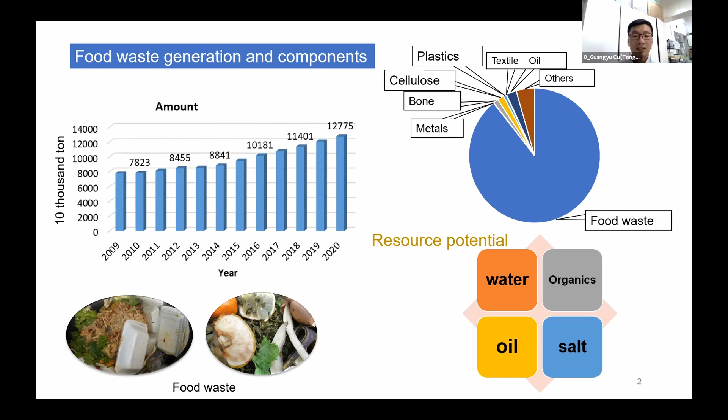Given the facts mentioned above and the faster society development in recent years, in our country several government departments, including the State Council, Ministry of Housing and Urban-Rural Development, Ministry of Ecology and Environment, as well as Ministry of Agriculture and Rural Affairs, released related policies and regulations about waste sorting and sourced resource utilization.

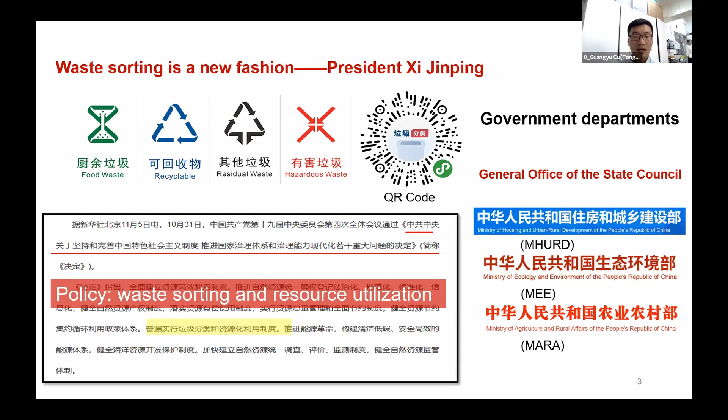For anaerobic digestion, although there is a high extent of harmless resource utilization, high cost and technical risk usually make the technology unstable, and anaerobic digestion is commonly not suitable for rural areas due to the cost of long distance transportation. In addition, for composting, long treatment time and low quality product are also problems. And homologous issues of feed processing may lead to quite high policy risk, even though the technology has high harmless and reduction levels.

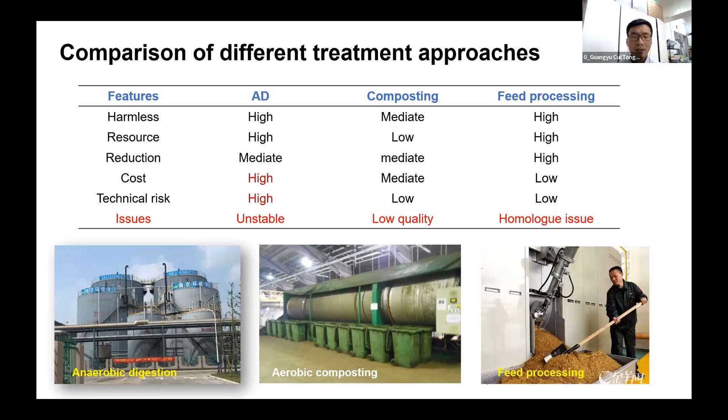Furthermore, by the way, to achieve the sustainable development of the world, in the general debate of the 75th session of the UN General Assembly in 2020, our President Xi promised that China aims to have CO2 emissions peak before 2030 and achieve carbon neutrality before 2060.

Bioconversion of food waste by housefly larvae or black soldier fly is regarded as a solution due to the high waste reduction rate and valorization level. Therefore, here we will share the state of the art technology, intelligent equipment, and a practical case.

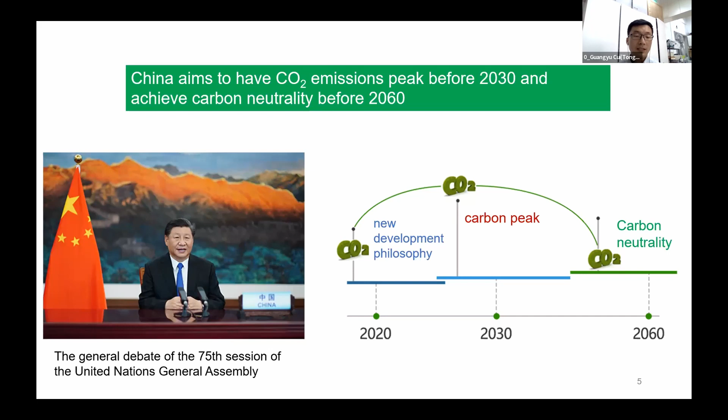After that, the material is transported through the automated guided vehicle system.

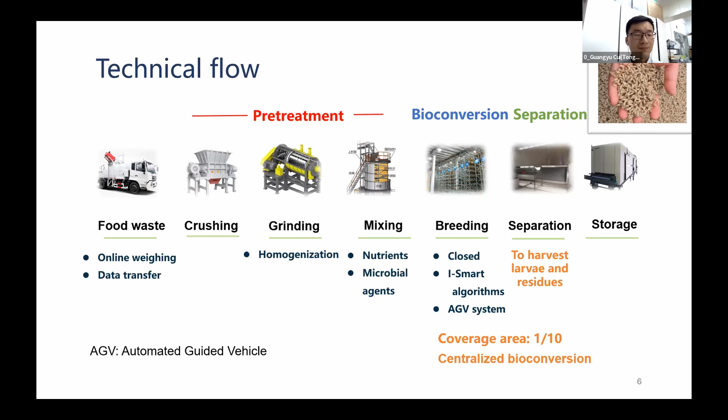Now I will share the key technologies of housefly bioconversion, including the iSmart algorithms and AGV system. Firstly, we need to put some important operating or environmental factors into the iSmart algorithms system.

Such as temperature, humidity, oxygen, water content, and so on, into the iSmart algorithms system.

After calculation of the neural network, we can know the optimal operating and draining parameters such as heating, ventilating, and mixing. Then the information will respond to the AGV system to further optimize the bioconversion performance.

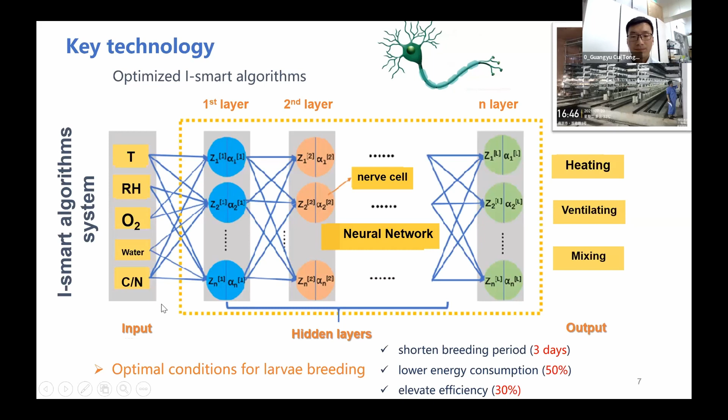Using iSmart algorithms can shorten the breeding period by 3 days, with lower energy consumption.

Another key technology is the AGV system, automated guided vehicle, in the bioconversion system. The AGV system achieves 3 important functions, including feed and larvae distribution, turning, and automatic harvest.

Therefore, the AGV system can efficiently improve the breeding environment and reduce manual intervention. In other words, it can reduce the whole cost.

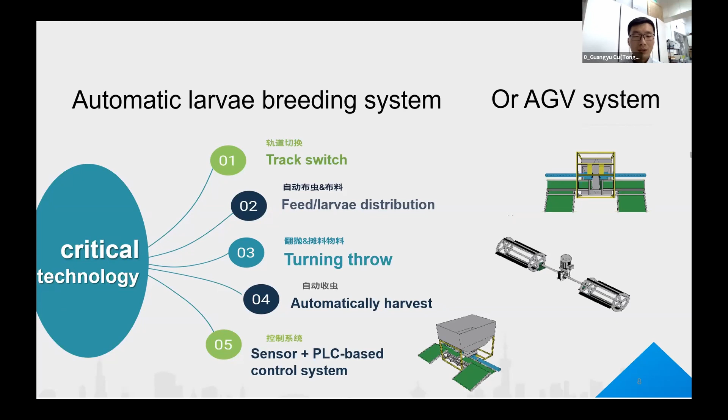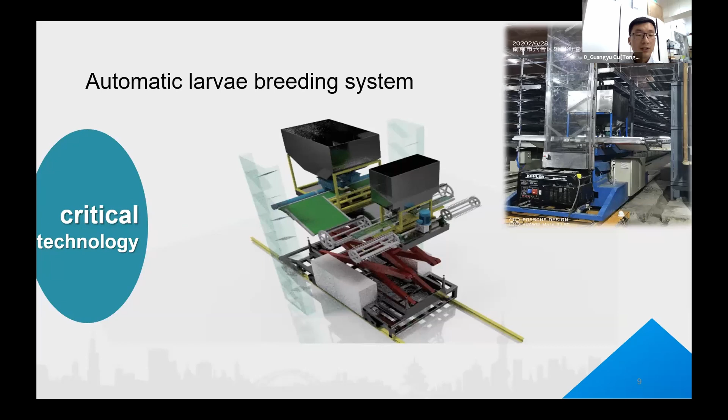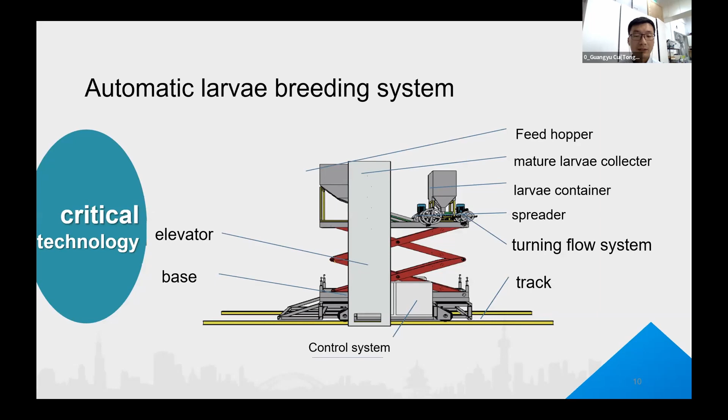This slide shows the AGV model and the actual AGV located in the organic waste recycling center in Nanjing, Jiangsu province. In detail, you can see the AGV includes the feed hopper, mature larvae collector, base, and elevators.

Of course, bioconversion of food waste via housefly larvae certainly generates malodorous gases such as ammonia, hydrogen sulfide, and methyl mercaptan, and so on. Therefore, in order to protect the environment inside and outside the workshop, a control method is needed.

Of course, we can get two products. One is the solid residue after bioconversion. It contains rich antimicrobial peptide that can resist plant disease and pests.

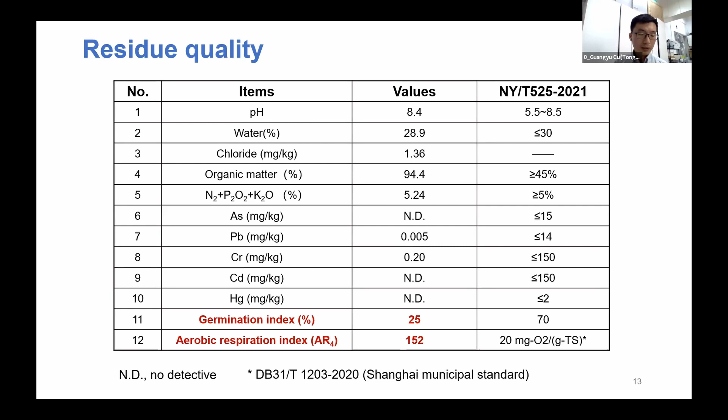So these results suggest the residue after bioconversion by housefly larvae is not mature and needs further composting.

By the way, as mentioned before, solid digestate from anaerobic digestion is also a very inevitable and annoying product. Here, we are conducting attempts for treatment of food waste and anaerobic digestate via housefly larvae.

This slide shows some of the experiment photos. Here, this solid digestate from the dry anaerobic digestion facility undergoes food waste bioconversion processing.

As expected, we find the highest waste reduction rate and the highest stability and germination index. The related mechanism is explained by the balanced meat and vegetable composition.

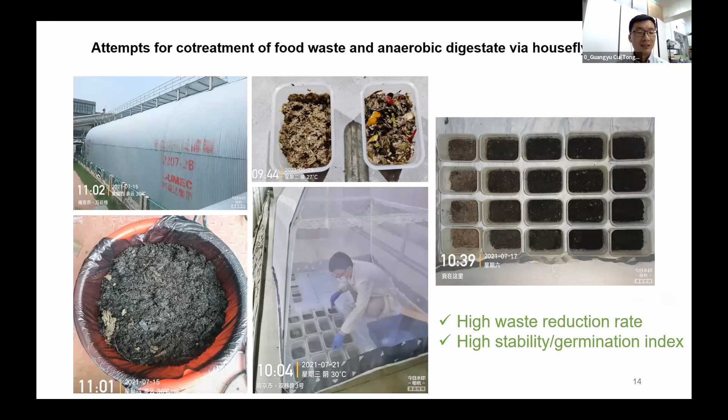Another product is mature housefly. It is verified that housefly larvae contain rich crude protein and amino acid, so it can be regarded as excellent and multi-purpose feed for fish or livestock.

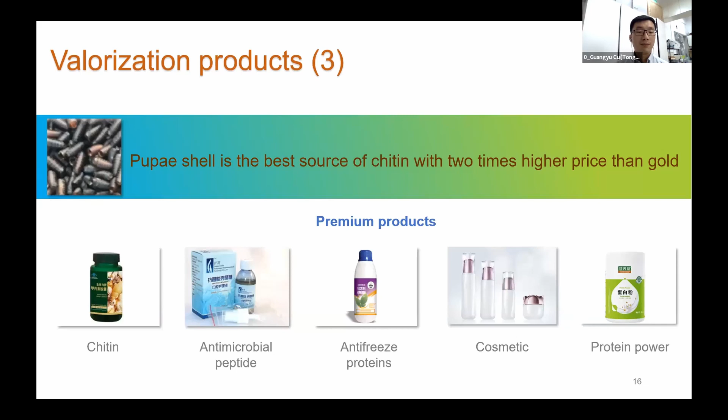People also use the pupal shell of the housefly to make many premium products. Here I share some photos of products from the pupal shell.

Besides the advantages in bioconversion technology and the final product, the profit model is also competitive. In China, companies can get a government subsidy of around 15 to 30% in total.

At the same time, the business model is BOT. The processing fee is around 150 to 300 yuan per ton, and the time limit is 20 to 30 years.

Since there are good product sales for protein source and organic fertilizer, the treatment approach has a very good economic effect.

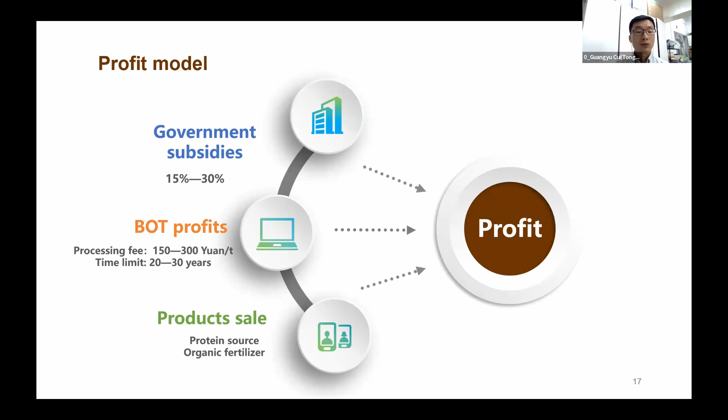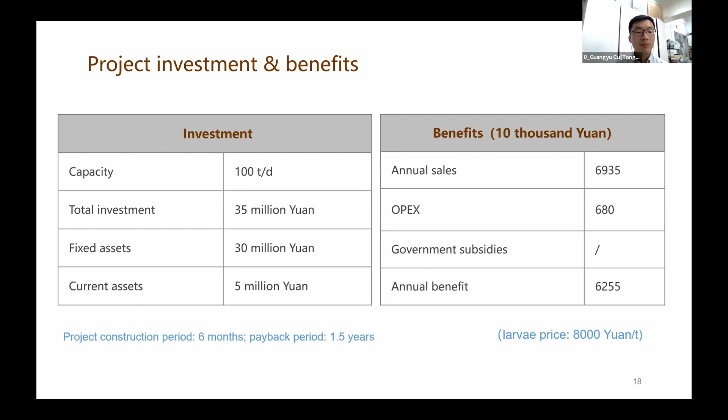Again, the slide shows the projected investment and the benefit. Take a case with the capacity of 100 tons per day as an example. We can see the total investment is around 35 million yuan, including the fixed assets and the current assets, while the benefit is around 62 million yuan per year.

This slide shows some information about the coverage areas, the populations, the environmental, investment benefits, and so on.

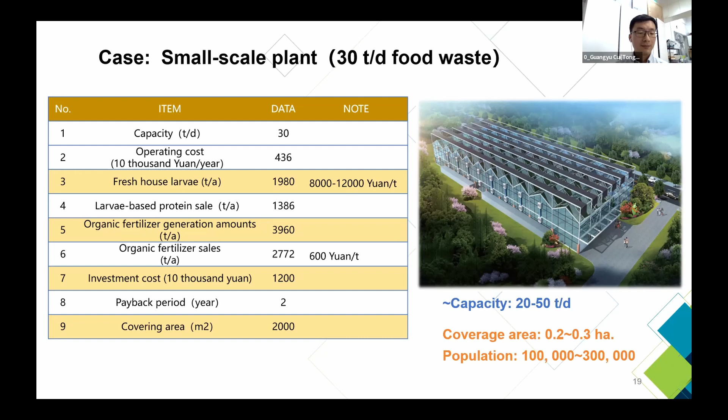A small scale plant, capacity around 30 tons per day of food waste. The photo shows the Nanjing Organic Waste Resource Treatment Center. Currently, the plant can treat 50 tons per day of food waste.

The left one shows the AGV in operation. The middle one is the bioconversion workshop, and the right one is the separation workshop. As I mentioned, the principle of separation is to achieve the separation of adult larvae and solid residues through the combination of light and vibration, so as to reduce the labor cost and improve the processing efficiency.

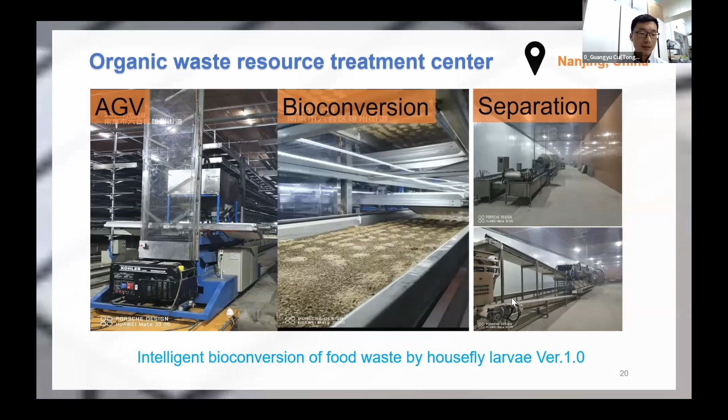Considering the many advantages of the treatment approaches, it is expected that relatively large-scale plants with a capacity of 50 to 500 tons per day will be applied in the future.

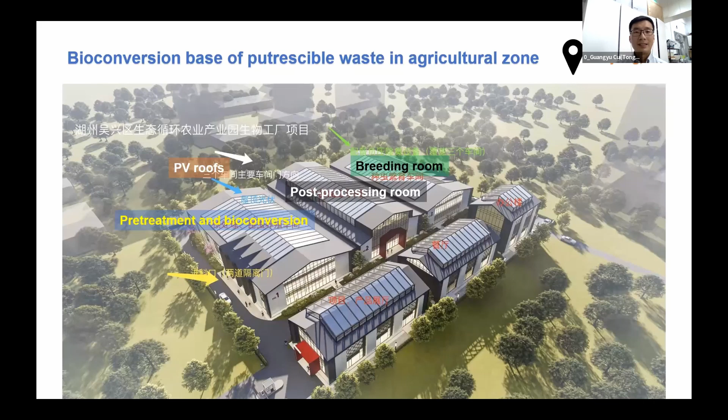This image is the bioconversion base of multiple sources of food waste or putrescible waste, such as livestock manure and food waste in agricultural zones in Zhejiang province.

That's all. Thank you very much for your attention.

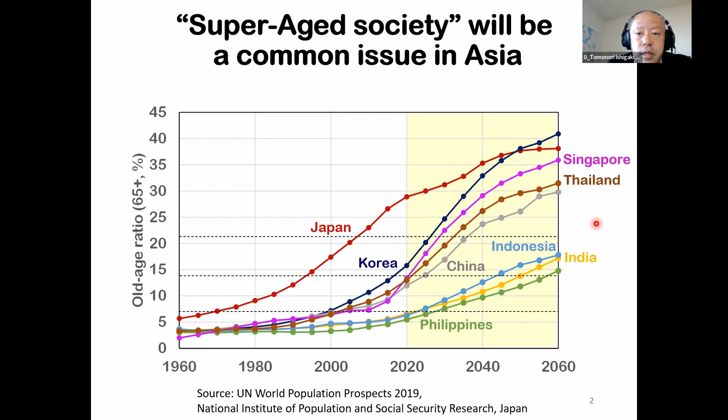In this situation, many local authorities are struggling to manage their budget or expenses to serve their public services, including waste management.

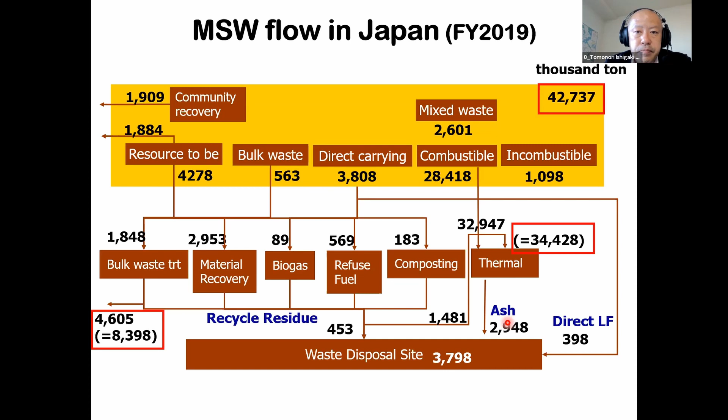This is also another side of the thermal treatment plant. There is another problem or situation: they are going toward more centralized processes, centralization to increase energy recovery efficiency, so you can see that the total power generation from thermal treatment plants is increasing, as well as the average power generation efficiency. So they are making larger furnaces or larger plants and increasing power generation.

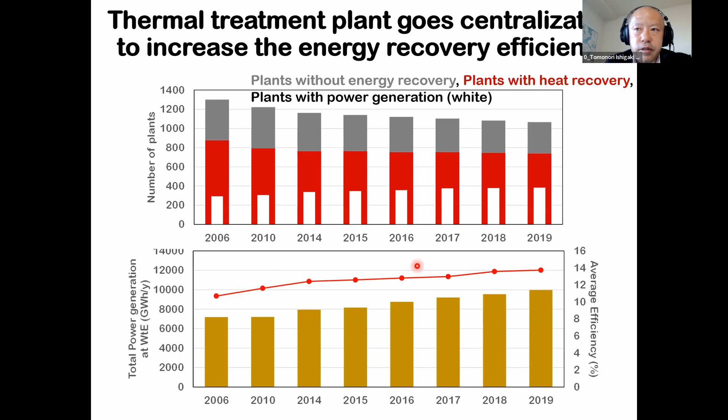And together with that, this makes it more difficult for the municipality to find the expense for managing this kind of larger plant. So simply, I should say that most smaller scale or middle scale municipalities still own smaller capacity thermal treatment, and this plant is becoming out of trend for power generation. So they should replace this treatment system with one more sustainable or feasible for their financial or even technical situation and local characteristics.

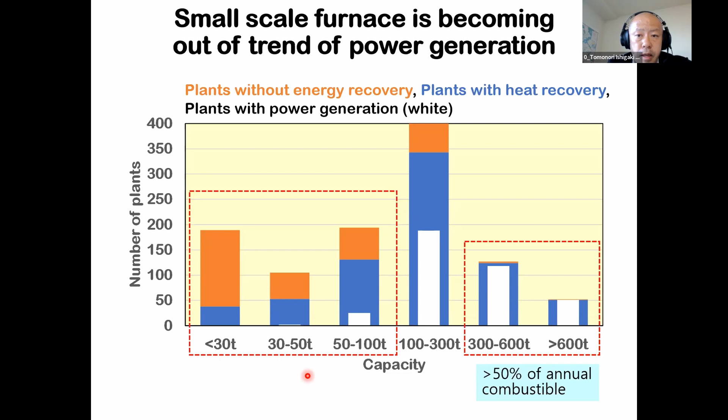So today I introduce mechanical and biological treatment, which is considered a sustainable or feasible solution for municipalities facing financial problems or needing efficient management of municipal solid waste. This is not only a Japanese case, but as I already mentioned, a very common issue in Asia, especially in terms of the financial problem.

I mentioned the super-aged society. That is one situation causing financial struggles, but together with that, some regions or municipalities are still under development. In this case, they also have financial problems. It is a different reason, but the same problem of finance. So some regions or municipalities are still far from centralization, so mechanical biological treatment should be considered as a transient technology as well.

Mechanical and biological treatment, so-called MBT, is the combination of mechanical processes, including waste preparation, shredding, crushing, separation, or other physical processes, combined with biological processes, including aerobic degradation, anaerobic digestion, bio-drying, or other biological treatment. The order of the mechanical and biological processes is very flexible. It's not fixed, and the applicable technology is also very flexible. So each local municipality can select the best available system with local existing technology.

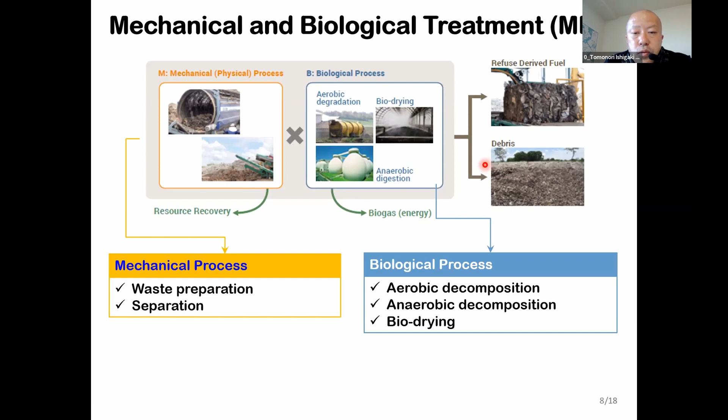The main output of MBT is so-called refuse-derived fuel, shortened to RDF, to be sent to industrial or public users of fuels. The other output is debris that is not worth using as fuel. Mechanical biological treatment was developed in European countries as a pre-treatment method to reduce the amount of waste, especially the organic composition, before landfilling.

So the strong benefit is the production of RDF, refuse-derived fuel, sometimes called solid recovered fuel, which is a separated high calorific value fraction of the waste. Of course, there is a strong benefit, but together with that, we should find a secure user of this fuel. Securing this user must be a critical factor for successful implementation and operation of MBT.

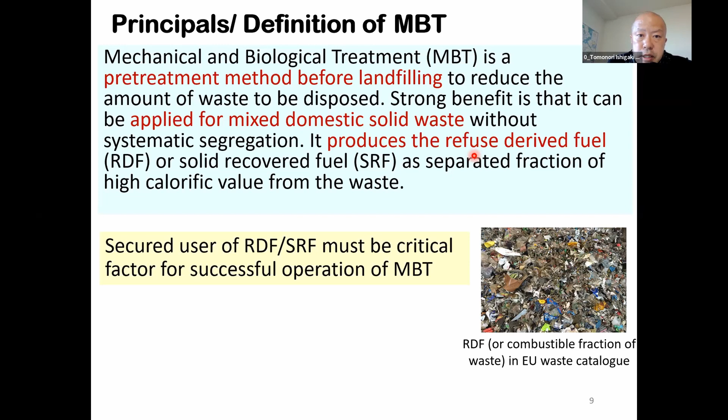There are several benefits of MBT. It can reduce the volume of waste very efficiently, and it has a sanitization function through the biological processes. In terms of technology, this process is highly feasible in combination with existing local technology, and we don't require any advanced technology or high-end machines. That is very helpful for municipalities that want to save budget or expenses for waste management.

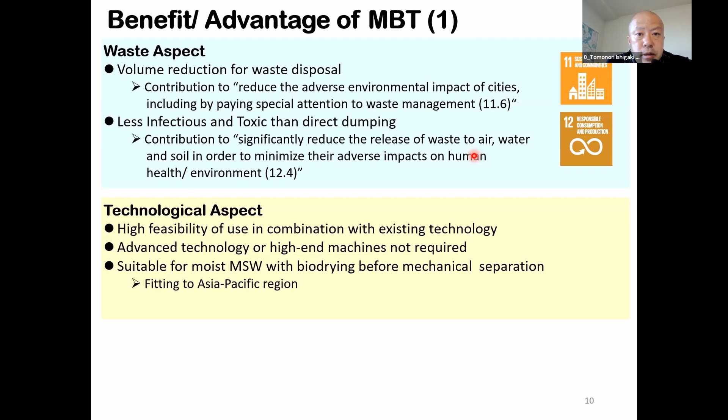In terms of resources, production of fuel, RDF or SRF, should be a very strong benefit in terms of sales. It also contributes to expanding the share of renewable energy in each region or in the country. And not only the fuel side, we also produce debris, but debris or residue is a bad name. So sometimes we call it compost-like organics, or CLO, and try to utilize these materials for backfilling or temporary covers in civil engineering or construction sites.

And it can also contribute to reducing greenhouse gas emissions or landfill-related pollution if we can appropriately manage the debris.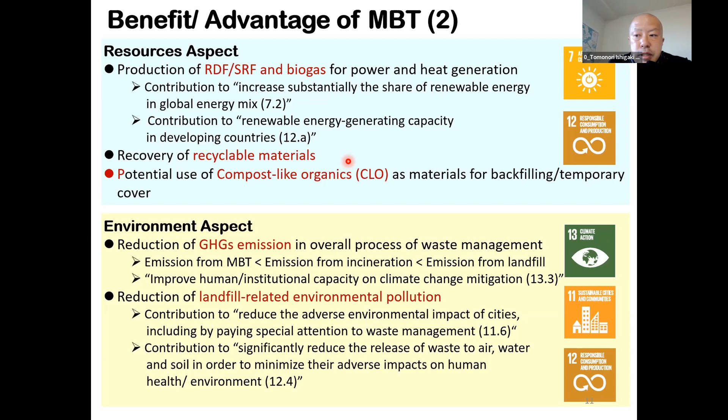And this is also very important for local and smaller scale municipalities: the finance or economic aspect. Yes, MBT is known to be a lower energy intensive technology compared to the other centralized waste treatment processes. And also the sales profit of the fuel is very attractive for the municipality as well.

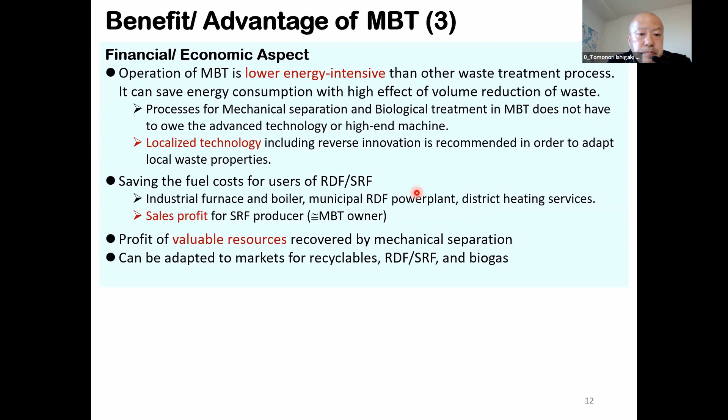So again, I'd like to emphasize the reasons to implement MBT for municipal solid waste management. One is that it is a very practical, sustainable and feasible sanitary pre-treatment of the waste. And it can save landfill capacity as well. And also it can enhance renewable energy production and utilization. And if possible, we can also appropriately manage the debris so that it can contribute to preventing pollution or emission from the disposal site.

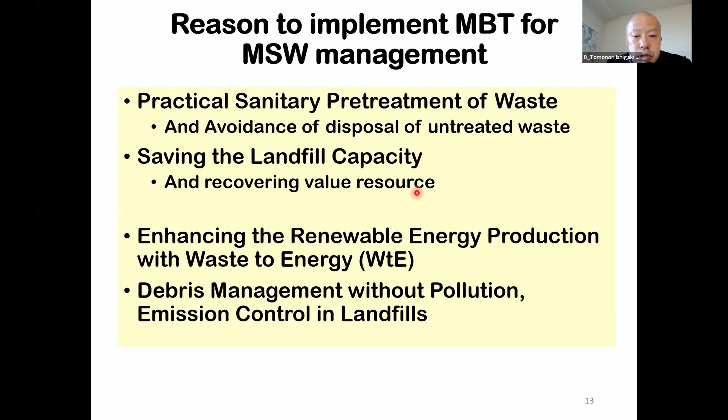This is a typical mass balance in one plant in Germany. I think this is very representative data. In this system, they adopt the mechanical process first, then send to the biological process. And they produce SRF fuel, about 20% of the initial input waste. And they also generate debris, about 50% of the input waste, and send it to the landfill site. This is just because of the local situation and also acceptance by the fuel users and landfill site.

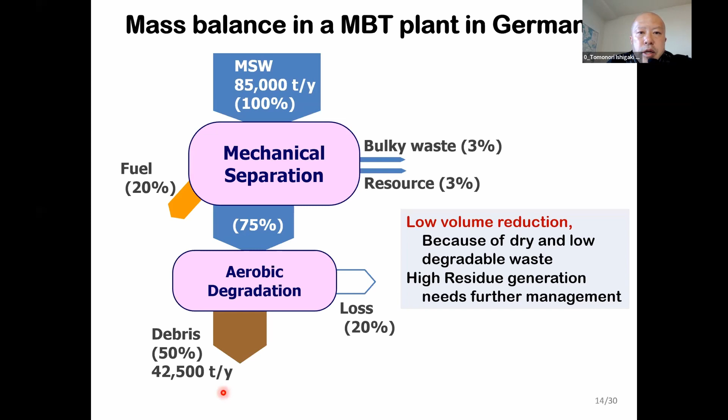Compared to the European situation, the big difference in Asia should be the waste characteristics. The waste in Asia is highly moisturized and also contains a highly degradable fraction compared to other areas. And sometimes these factors could be a certain barrier to implementing MBT.

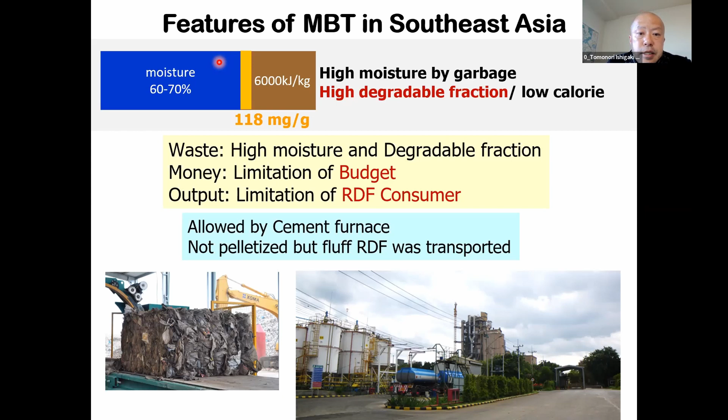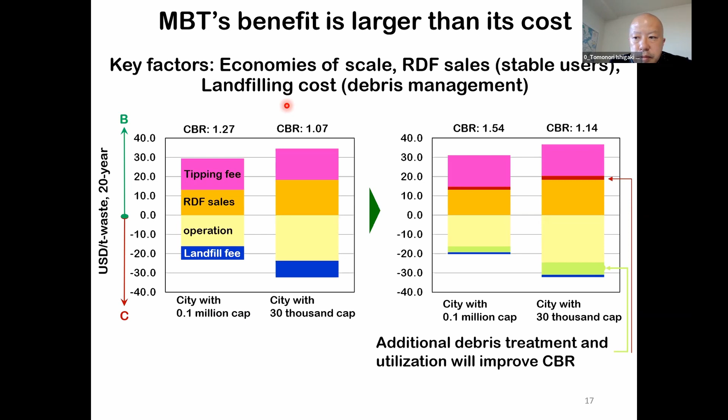I'd like to conclude my presentation here. MBT could be recommended for municipalities or regions struggling with financial problems, which may be caused by a super-aged society or still being under urbanization. The important thing is this is recommended for regions or municipalities still not so suitable for implementing the centralized process. And also we need a certain industrial background or accumulation of industry

for securing fuel utilization. So it is very good if we have certain local industry like the cement industry, paper manufacturers or wood industry. They can use many fuels, and they also need a certain reduction of cost for fuels. Or if there is some remaining capacity in a power plant, it is also a potential fuel user. So the selection of MBT technology depends on the scale of cities or industrial accumulation, and we need to analyze this information, so logistics is very important.

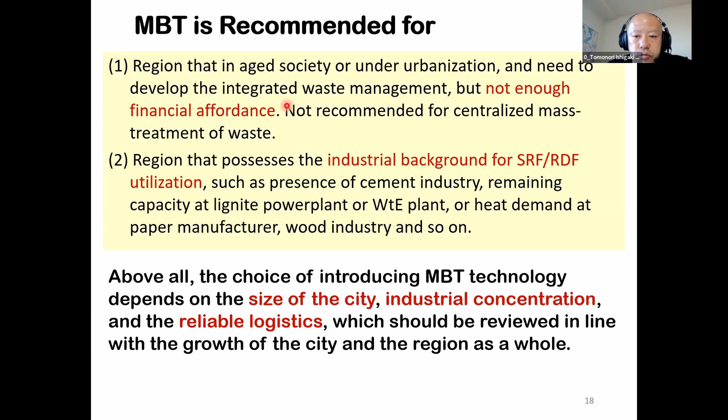That's all my presentation. I hope this is very informative for audience and panelists in this session. Thank you very much. Thank you, Chairman. Thank you, Dr. Ishigaki, for your nice and very clear presentation.

So, in fact, we have another and the last presenter from India. So, dear Secretary, I'm not sure if Dr. Rishirana is available or not. Hello? Well, thank you so much, Chair. I actually sent her a reminder, but it seems that she has not joined yet. Okay, so that means we can now move to the question answer time, right? Yes, yes, please go ahead.

Okay, so anyway, thank you to our three speakers for your wonderful presentations. Now we have question answer time. If you have any question, please feel free to ask, or maybe you have any comment. And you also can type your questions or comments in the chat box. Okay, so any question for our three speakers?

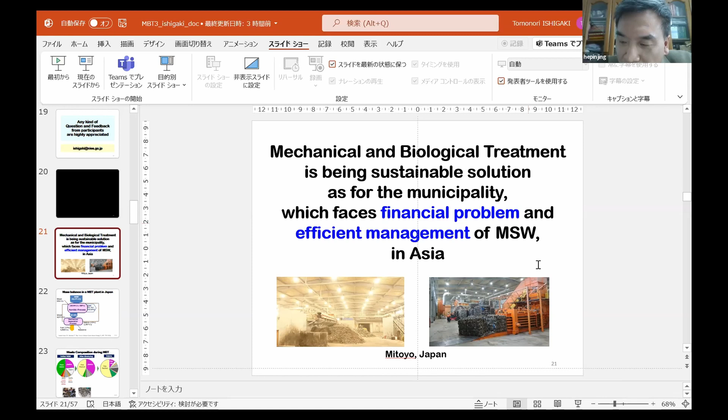Yes, I'm also very interested because in your presentation slide, I noticed there is a photo. I don't know if I'm right. There is a city, Mitoyo, in Japan. You showed us a photo. Is there any kind of facility where you use the MBT process to treat your municipal solid waste, and some detailed information? And also you gave another slide showing the application in Thailand. Could you give some detailed information for these two applications? Thank you very much.

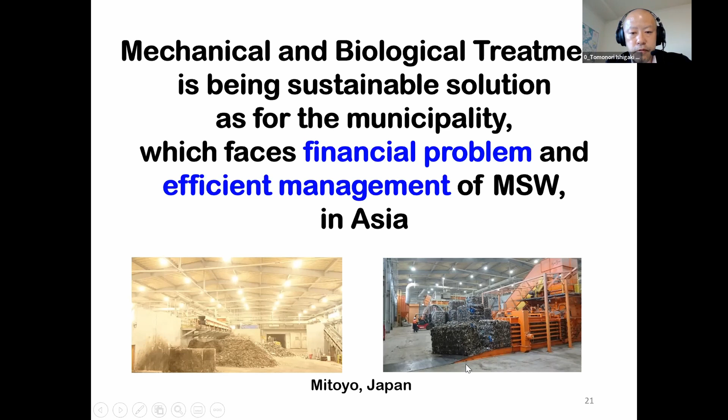Okay, one is about the Japanese case. Yes, you're right. Mitoyo is one of the Japanese municipalities applying MBT technology. This picture was taken in Mitoyo City. The left-hand side is just a kind of separation process, and this is the fuel to be sent to the private industry. Its capacity is about 10,000 tons per year. Today I didn't show this slide, but briefly, they apply the aerobic process first. They call it tunnel composting, but it's more like in-vessel composting, and then they send it to the mechanical separation processes. The production of fuel is 27% of the initial input.

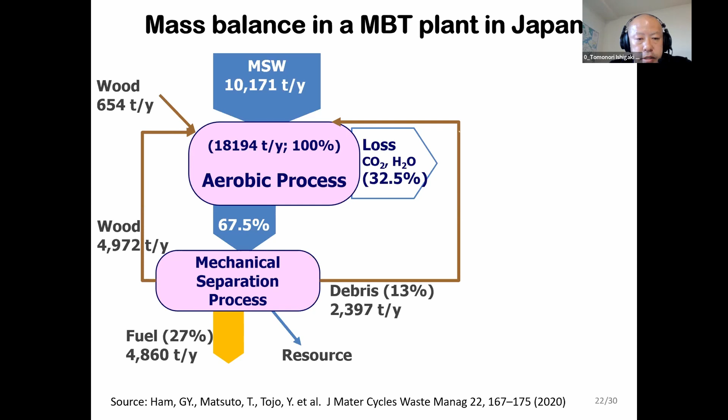So they have huge land, they prepared a huge land for drying, like making such kind of plain waste layers with some aeration system as well. So it takes a very long time. As far as I remember, it may take 90 days or 100 days or more sometimes. But at least it is very cheap, or I should say that we can save the cost of operation of the drying process and then send it to the mechanical separation.

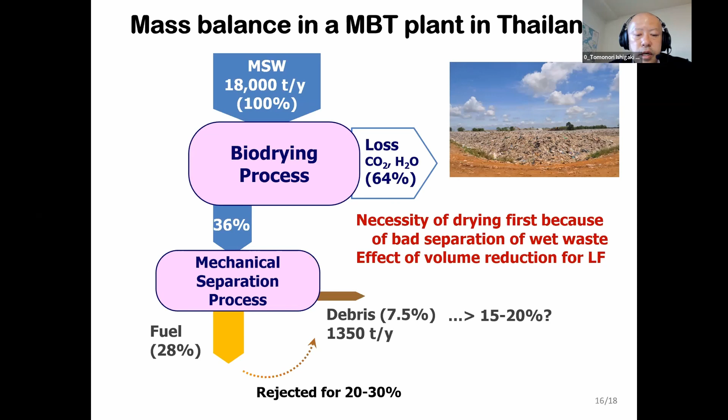You can see that the scale is 18,000 tons per year, briefly. In Thailand's case, I remember some other cities also have these kinds of MBT systems, and the scale starts from about 5,000 tons per year, and I think this city, at 18,000, is one of the largest scale in their country so far. And this is the situation in Japan and Thailand.

And also I have one more question in Q&A. He'd like to ask about the oil extraction of food waste in Japan. He said in China, it is very common to extract oil from food waste in the pre-treatment of AD. Does the AD plant in Japan do that? As far as I know, yes. Today I talk about the municipal solid waste, but food waste is mostly categorized as industrial waste or some business waste.

In this occasion, yes, we don't call it oil, but the grease itself is a kind of inhibitor for good treatment in anaerobic digestion or composting as well. So removing the grease is a very critical part of the processes. And such removed grease is also utilized to produce some fuels like biodiesel or other valuable organics.

As far as I know, it's hard to directly extract the grease from the municipal waste. But if we have segregated food waste, yes, that is a target for the removal and utilization of grease, I should say oil, contained in the waste. I think so far that's all for my question. Yeah, okay, thank you. And Dr. Cui, do you have any comment?

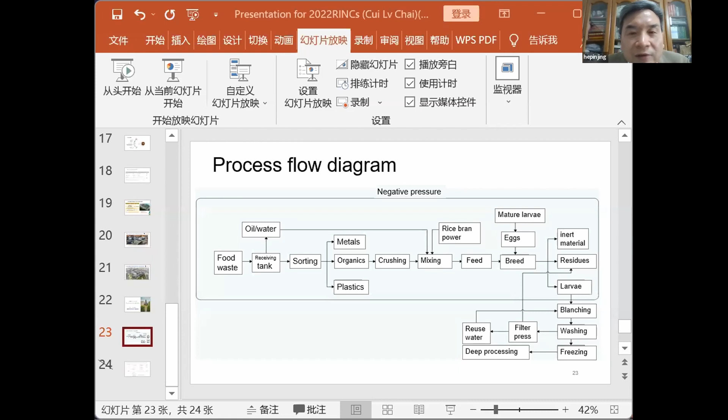Okay, so I noticed there is a comment. Oh, yes, questions in the chat box, from Malaysia, and Qihe. How to control the odor? And I think this question is not only for you, but also for Dr. Ishigaki. I also have some doubt about the last slide Dr. Ishigaki just showed us in the Thailand case, the photo. So how to control the emission in MBT or BMT? So please, Dr. Cui first.

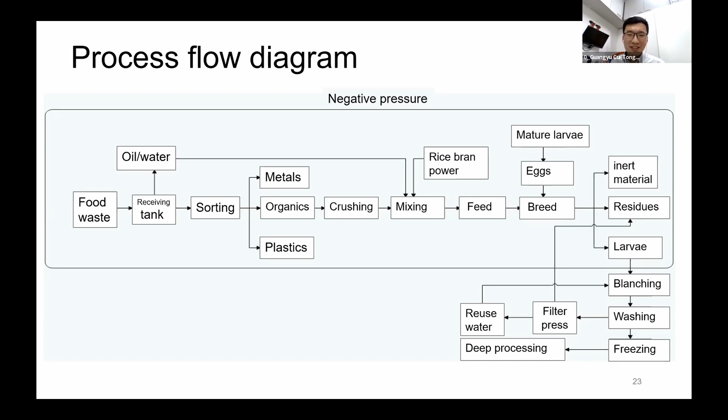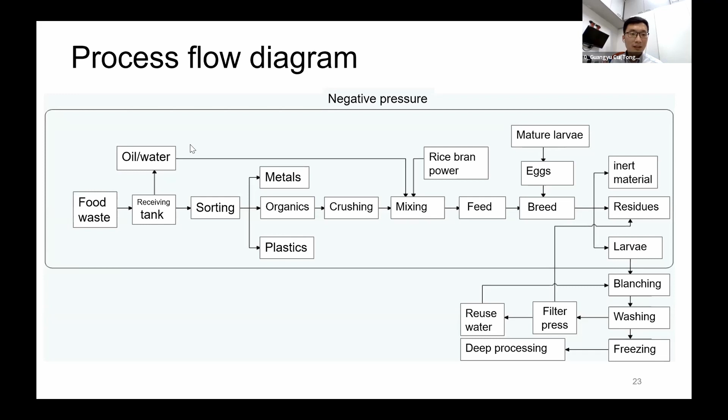Okay, for the housefly bioconversion systems, here I show the process flow diagram. We can regard this one as a workshop. Inside the workshop, the pressure is negative, so we can avoid the odor emission to outside. After that, we collect the odor gases into the waste gas treatment system. This one is the spray tower. So the odor gas is absorbed and degraded by microorganisms,

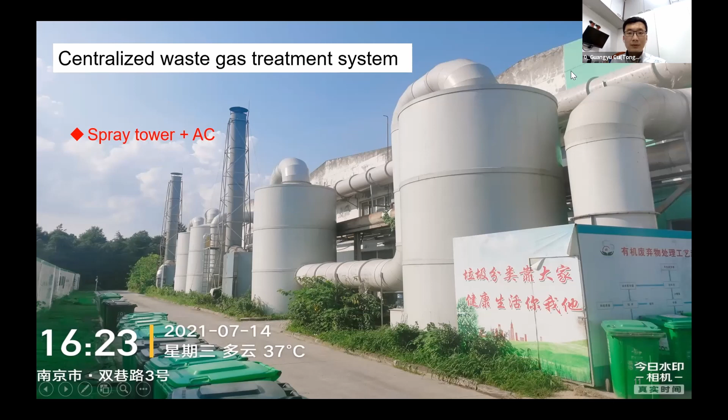and then this one is the second spray tower. Here is a carbon box. So finally, some remaining gases can be treated by activated carbon through adsorption. Okay. Thank you. Any question or comment?

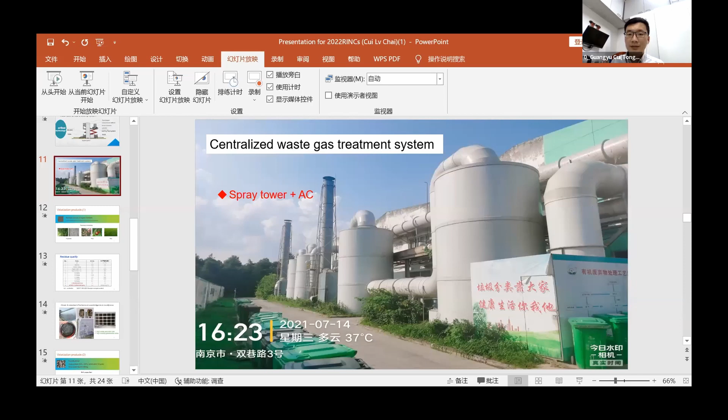So I still have a question for Dr. Ishigari, because we are very interested in the waste treatment in Japan. So my question is, is there any good technology or suitable technology used in Japan now for the decentralized technology or equipment now used in Japan? Can you give us some introduction?

Well, in terms of the decentralized, today I talk about the MBT process, and some small scale municipality is going to select this technology, replacing the thermal treatment technology. And if I say very small rural areas, I think they try to have more segregation, segregating organic food waste from municipal solid waste, and utilize biological processes like anaerobic digestion or composting processes. I think these practices are being increased in Japan as well.